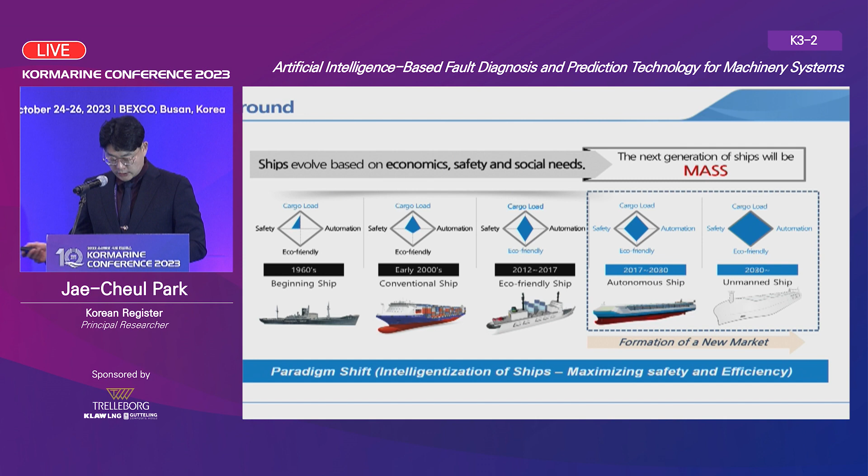And these are one of the main issues in the shipbuilding and maritime industry. And these technologies can solve many problems, including the environmental issues. So a lot of researches have been conducted. And these are the technological classification consisting of MASS. It consists of operation, navigation part, and information processing systems. It also consists of data analysis and data acquisition system to ensure safety of the vessel.

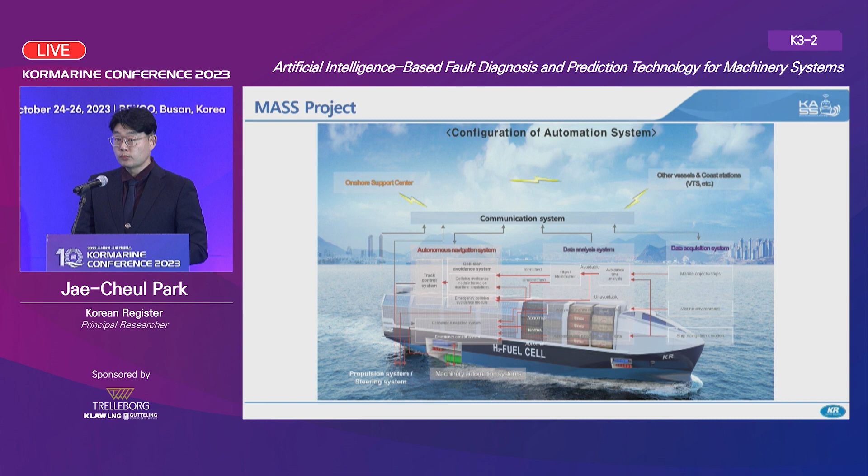In order to enable automated navigation of the vessel, we have to collect various data sets and we have to make accurate prediction and diagnosis of the status of the vessels. These will be the basis for the maritime autonomous surface ship development. And along with our efforts for developing MASS, we have to establish the logistics and infrastructure system for ports because we have to enable efficient communication between ships and the port.

MASS should be operated properly and should exert all the functionalities. And this requires smart port. So in Korea, smart port and smart communication are being developed. And it also includes technologies that deal with smart logistics and optimization of safety and efficiency. There are various element technologies included here, 3D around view technologies, and as Dr. Kim said, it includes automated mooring system, risk detection, and operation control system as well.

MASS and smart port need to be connected to each other, and for this purpose, technologies are being developed. When such technologies are fully developed, then we will be able to ensure efficient operation and safety of autonomous ships based on PSC inspection support and berthing and mooring support, as well as loading and unloading support systems. Once we develop all these technologies, then we will also have to work on digital twin technology development.

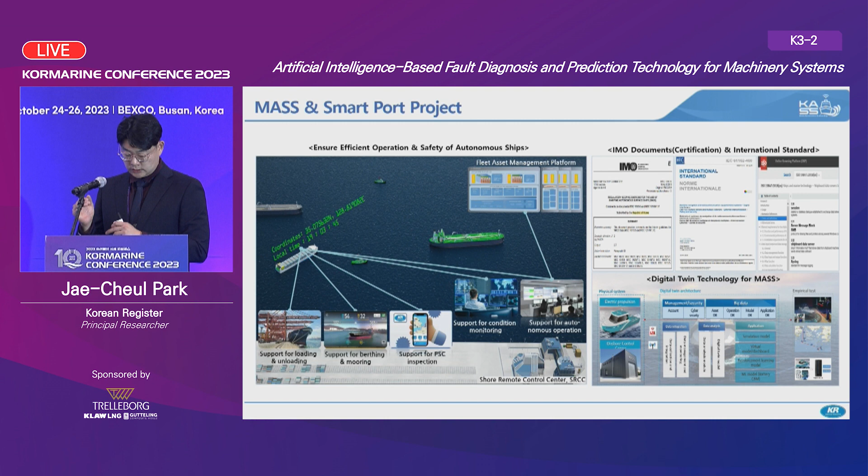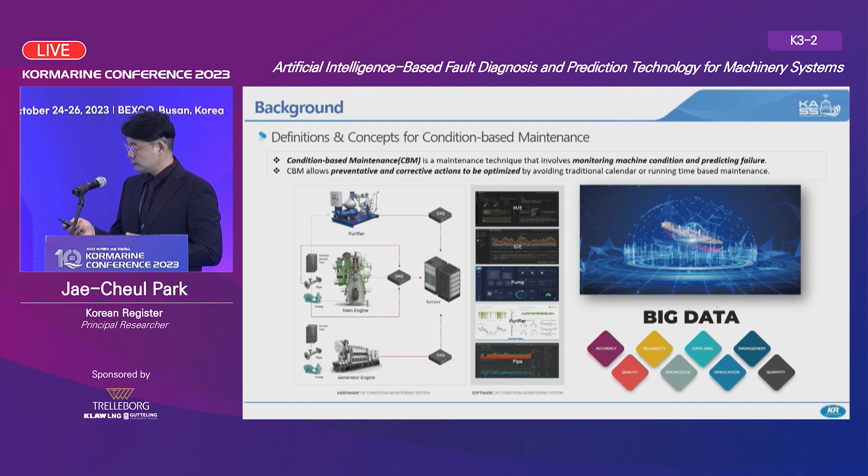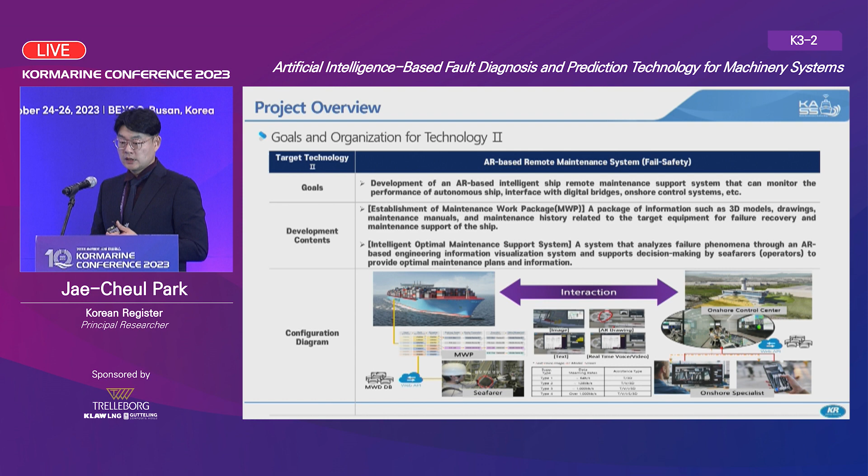For development of CBM, we selected some equipment, which includes main engine and generator engine, and pump and purifiers, as well as piping system. These 5 categories of equipment are the basic elements based on which we're developing CBM technologies. And remote maintenance technology is also being developed, but today I am going to skip that part due to time constraints.

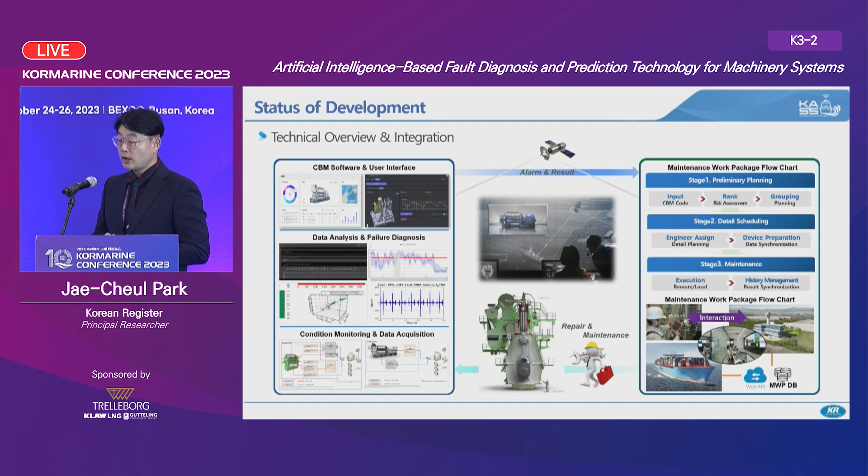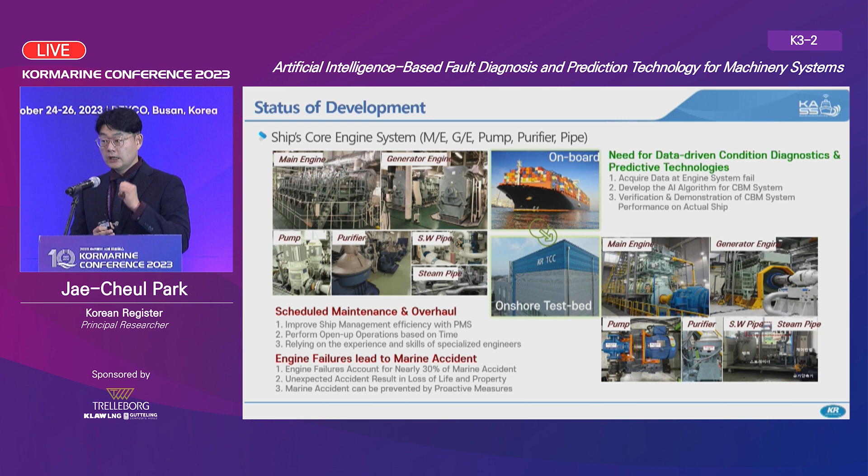When we first developed CBM technologies, we installed the monitoring system on the vessel. It should generate data, and once we collect and store data, we thought that we could get a valuable insight from the data. But if we don't have the fault mode data, it's difficult to develop the algorithm. So in the main ship, we established a land-based test bed, and we arbitrarily caused an error and used that fault mode data. This is the process we went through.

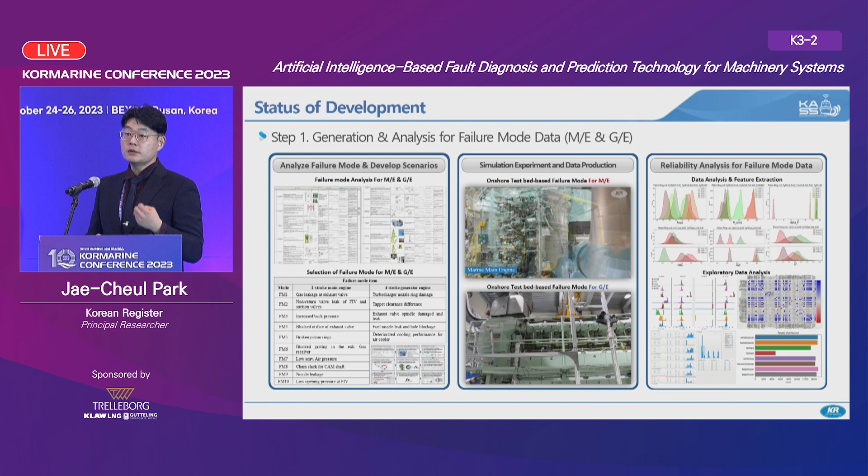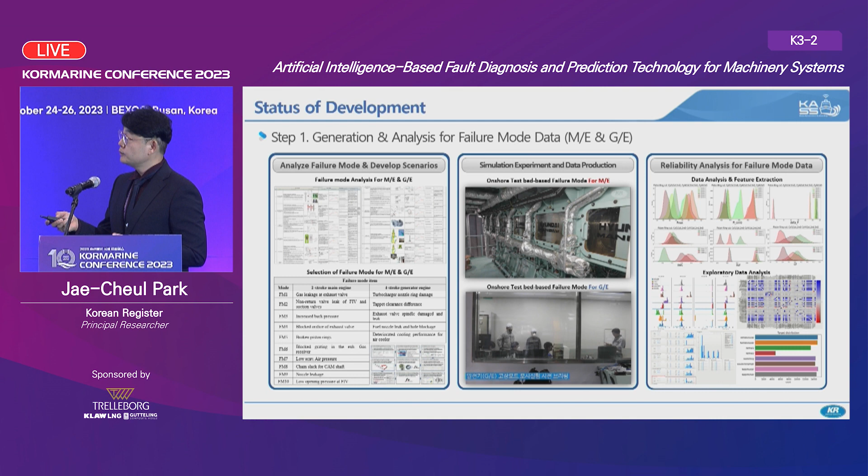For this kind of testing, we have to analyze what kind of error we're going to create, and we have to set criteria over the specific type of fault, and then we have to create the fault mode scenario. We have to develop the test methodologies. These are what we did before. After producing the relevant data, we have to apply this to our algorithm. So we had to analyze the reliability of the data.

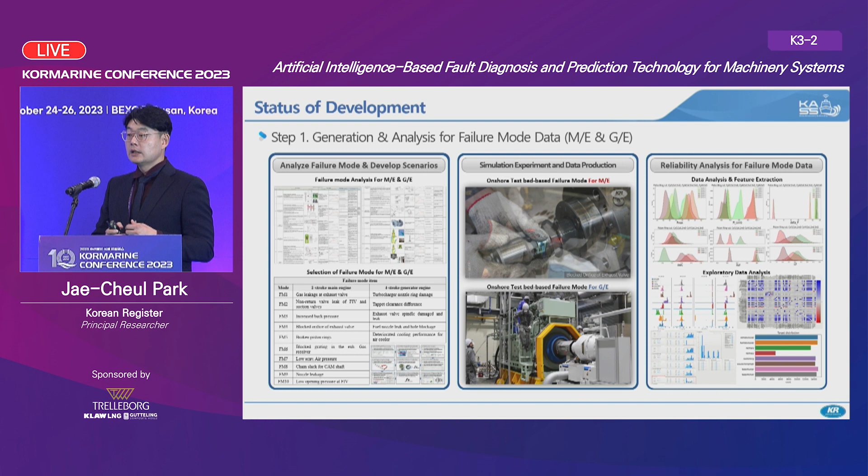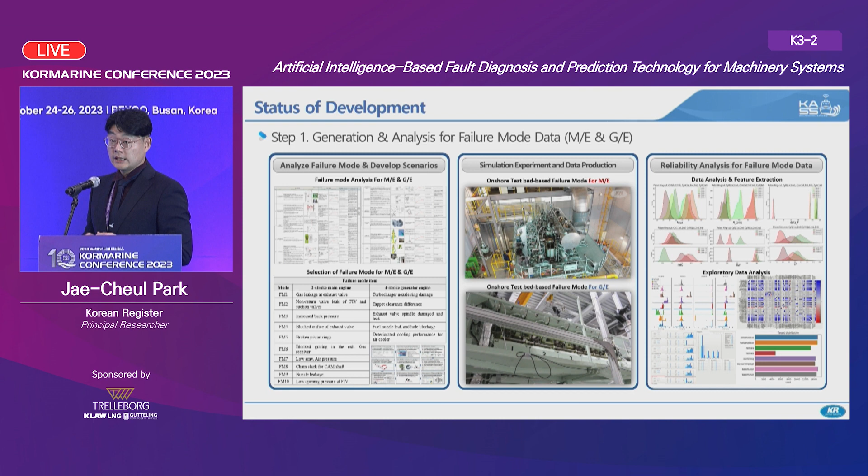This slide shows the actual fault mode data, and under the fault scenario, we operated the systems and we reassembled the equipment as well. So the test went on for about 5 hours.

As mentioned before, not just engine and generator, but also pumps and purifiers went through the testing. We established a test bed, and under the same research framework, we developed the scenario, generated the test data, and conducted simulation as well. Mokpo National Maritime University and Korea Maritime and Ocean University worked with us.

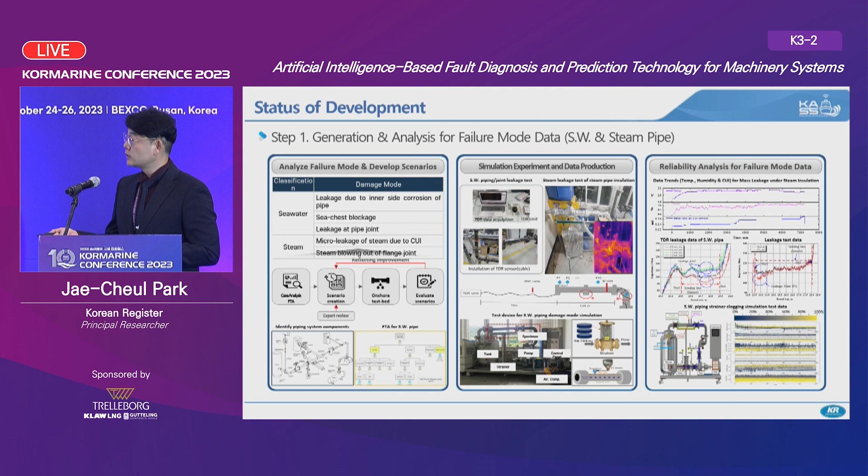We represented the damage on the vessel through the scenario and analyzed the relevant data. After data analysis is completed, we can have the data framework where we can use the data diagnosis algorithm. We extracted the data features, as you see here. The data generated through the research process, including vibration data, internal pressure data, temperature, and many other operational data, were collected and analyzed.

Our server would be overloaded with such a huge amount of data if we had to apply all the data. So we extracted important features of the data, analyzed the data, and applied them to the algorithm. We collected the time series data, converted the data to recurrence plots, and developed the algorithm. Regarding the internal combustion engine, we used our source data, and the algorithm performance showed about 95% accuracy.

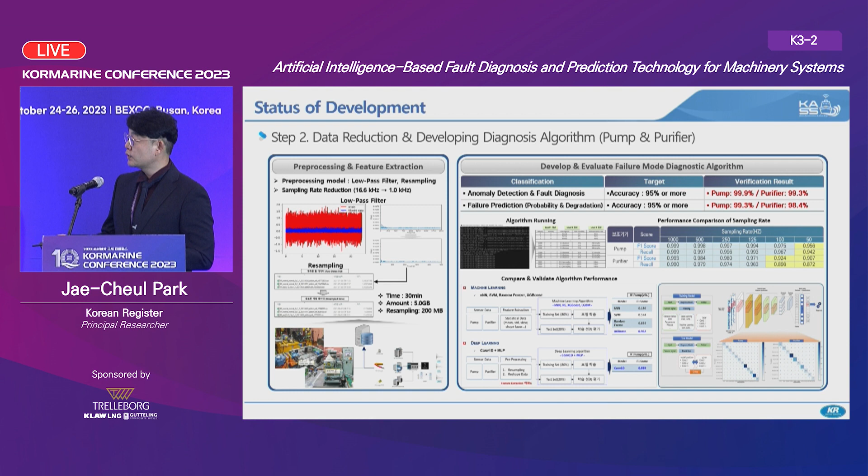In the case of the pump and auxiliary systems, we also developed a diagnosis algorithm based on machine learning. Its performance level is over 95%. The same goes for pipes. Various imaging, temperature information, electrical resistance information and corrosion-related information were collected, measured and analyzed. Based on such data, we developed the diagnosis algorithm, and performance of the algorithm is also around 95%. For this one, we finished the testing.

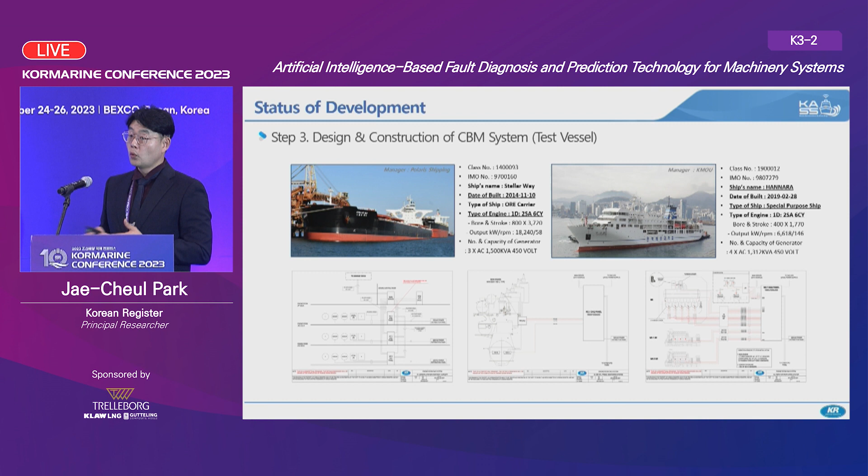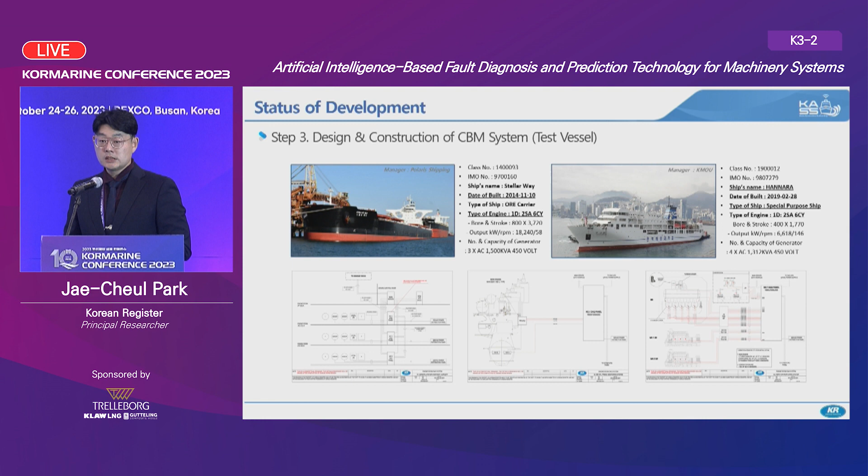In February next year, the demonstration vessels will be delivered, and we need to ensure the performance of the system on the real vessel. At first, at lab level, we used the algorithm based on error data that we arbitrarily generated, but from next year, we're going to use Polaris vessels and the Hannara vessel to demonstrate the CBM system algorithm that we developed.

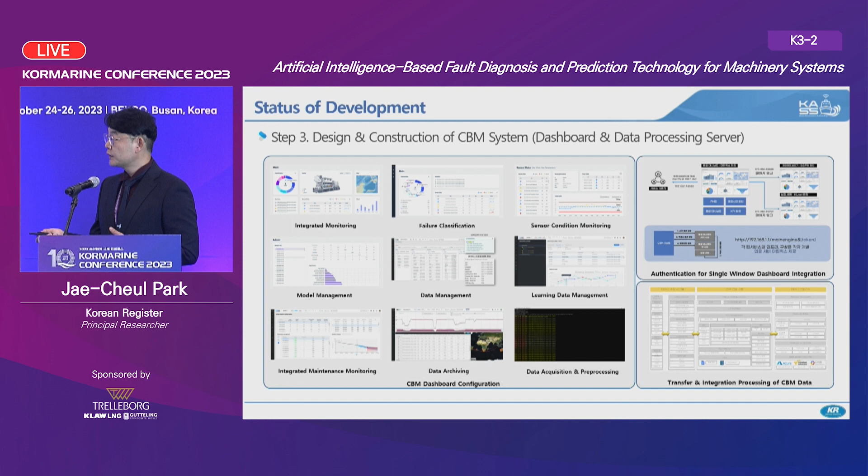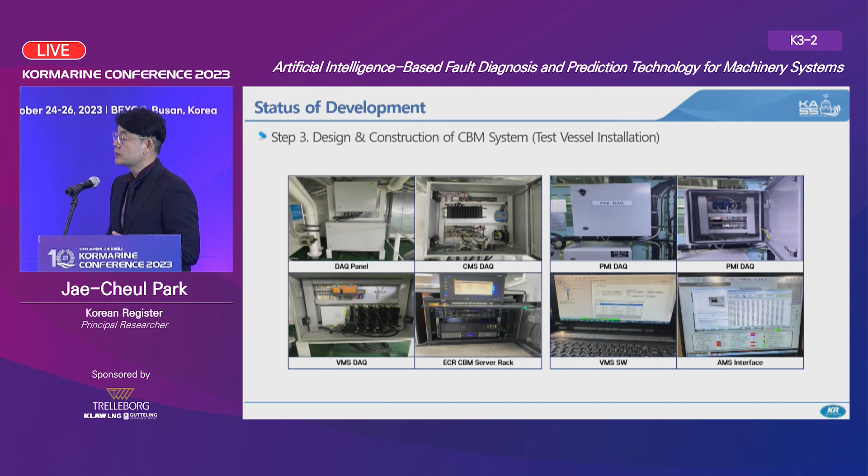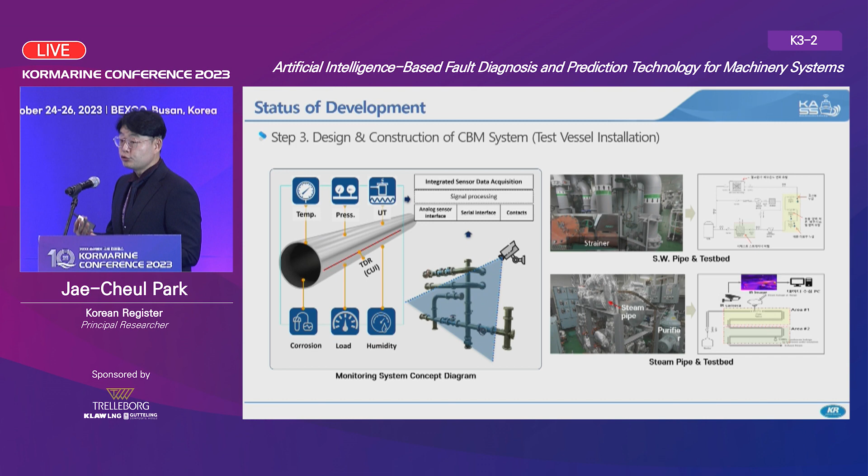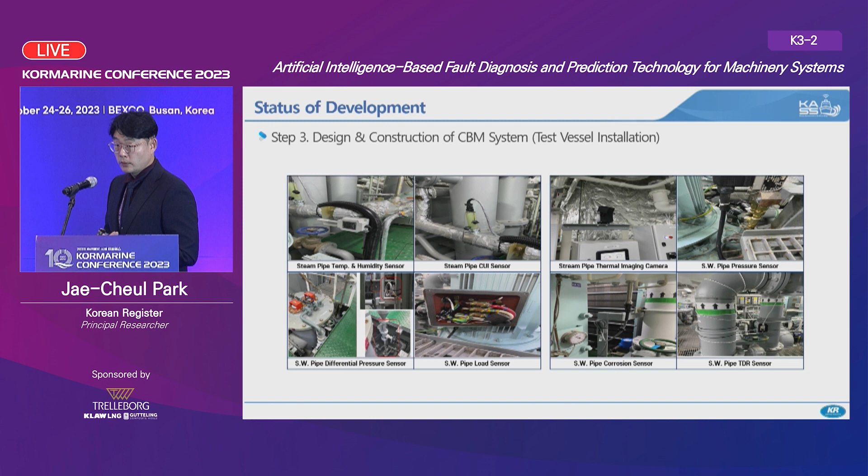This is the current status of dashboard development. This dashboard is installed in the main demonstration vessel. This slide shows various sensors and systems installed on the vessel named Hannara. We installed various sensors. Although we have to discuss the effectiveness of this idea, as you see, this is the system installed in the test vessel from Korea Maritime and Ocean University. We are optimizing the test systems by reflecting the feedback from operators, and we are continuously improving the diagnosis algorithm.

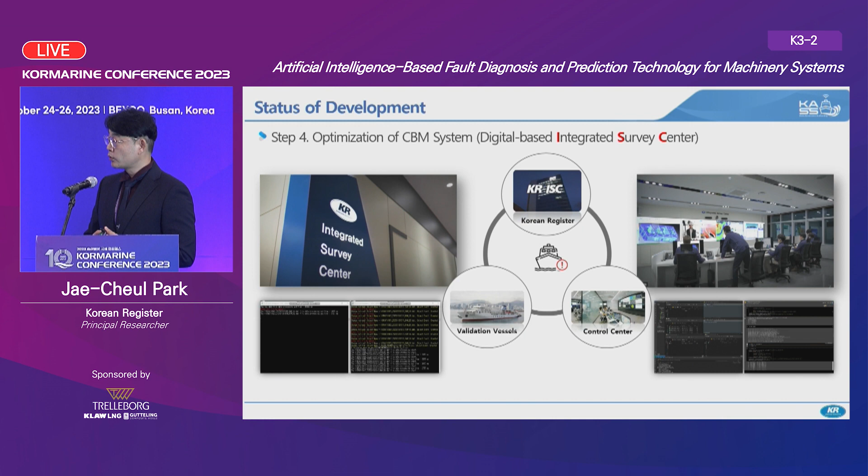Our KR-ISC center receives the data, and we are establishing an infrastructure to optimize the CBM system. We are going to enhance the survey or inspection service we provide to the stakeholders. Our future plan: we will continuously receive feedback regarding what we developed, and we will make continuous improvement. In February next year, the demonstration vessel will be delivered, and we are going to reflect the feedback we received from the relevant stakeholders in the demonstration vessel.

One of the mainstream activities of KR is inspection. Considering this, I would like to explain possible digital services. Remote inspection or extension of the inspection cycle will become possible. So we are trying to establish the technical infrastructure as well. We have to refer to the IMO or IACS regulations. In terms of technology, we are conducting AI convergence research activities to develop digital service inspection methods. These are the purposes of our digital service.

We would like to enable long-term partnerships, and we would like to make it possible to provide remote diagnosis services through our technology. For consulting services, we need efforts from all interested parties in the industry, including the Korean Register and many other participants of this industry. Regarding remote and automated inspection technology, we need the joint efforts of all interested parties.

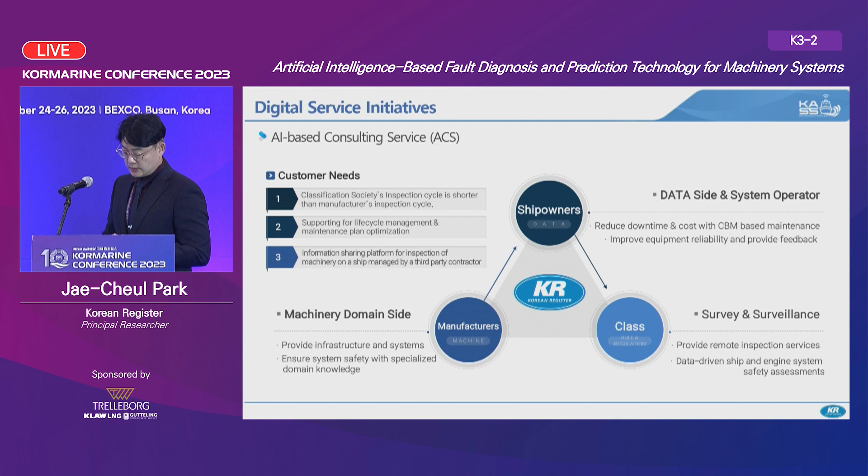As you see here, manufacturers and machinery domains, as well as class societies, need to maintain an organic relationship with each other, help each other, and have accurate understanding about the status of the business. Although they could have separate business models, they need to have a consistent voice regarding the technologies. And we're trying to digitalize the inspection service we provide. So we are studying very hard to come up with ideas for digital services based on the CBM diagnosis system.